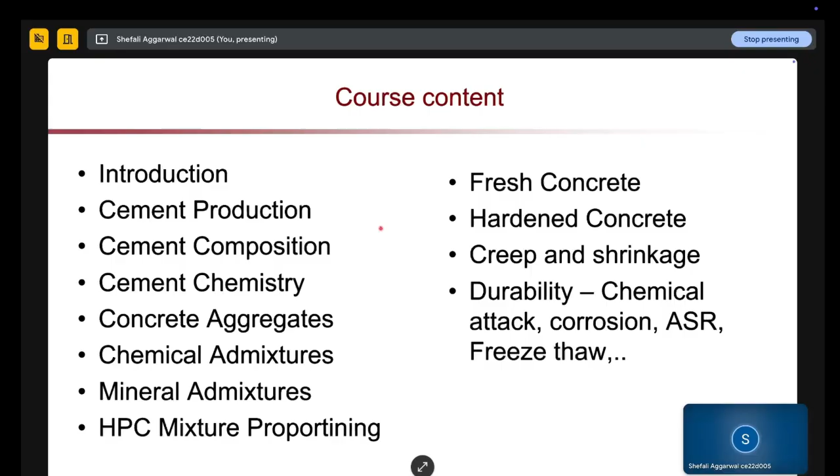So in this last lecture we'll be starting with the durability of concrete. As we discussed last week, the main durability issues with concrete systems are corrosion, then chemical attack like sulfate attack, then alkali silica reaction, then delayed ettringite formation. Why these issues happen depends on the transport mechanism in the concrete system, what materials you are using, and what mix design you are using. And normally, unlike strength properties, we are not checking durability properties beforehand, before doing mix design.

We stopped our last lecture on ettringite formation, the different types of ettringite forming in the concrete system. First is primary ettringite, which forms at the early stages because of the hydration of which component? C3A. Okay. Other is late primary ettringite, where more sulfates are present, which gives late ettringite formation. If you remember our hydration curve, it will show this late ettringite formation.

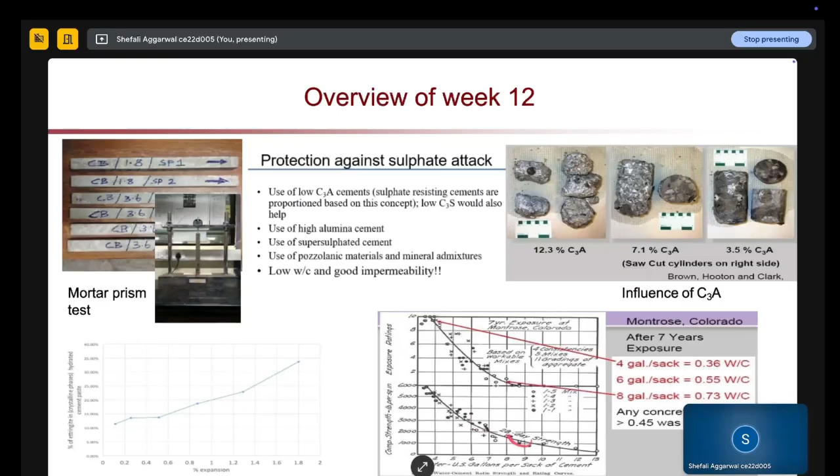The other thing is how your water to cement ratio and other factors are affecting your expansion rate. This is a PCA study done on a similar basis: this is your strength value, this is your exposure rating, and here we are talking about water to cement ratio. It is not given as we use nowadays, like 0.36 or 0.55; it is given as US gallons of water per sack of cement. Based on that, how your strength and exposure rating are changing. If you have more C3A, more ettringite formation, what will happen? Because of higher water, your strength will decrease.

Next, what are the different tests which can be done for sulfate resistance? The first test is ASTM C452, in which we add gypsum to the mortar bars to get 7% sulfates, and 14-day expansion is measured. The next test is ASTM C1012, where mortars are externally exposed to sodium sulfate solution after attaining 20 MPa of strength. In this case also we measure expansion. Since C452 is internal sulfate, we measure at 14 days; in external we measure at 6 to 12 months. So these are the two tests we do for checking the sulfate resistance of our concrete system.

Here again is another example showing how water to cement ratio changes the property of our concrete system. If the water to cement ratio is higher, you can see more white chunks forming, and at lower water to cement ratio you have a denser concrete. So here you can tell more ettringite formation and less ettringite formation. Okay.

And from this example, this is an example of external sulfate attack. Because of sulfate attack, ettringite formation and crack formation, your concrete is getting deteriorated. This is like salt crystallization, physical attack, the same concept. Because of the presence of sulfates in your soil, there will be more formation of needle-like structures, and your concrete will get disturbed.

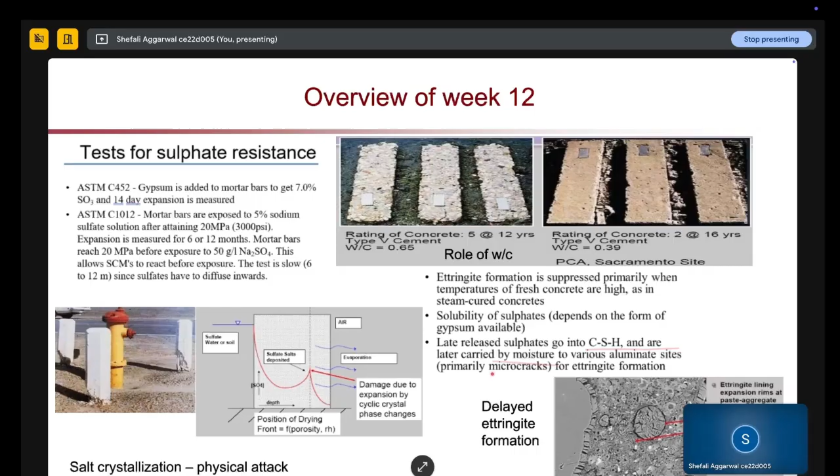So in this case, what is happening? This is the mechanism of DEF. It is mainly suppressed when temperatures of fresh concrete are high and in steam curing. Because the sulfates, depending on your gypsum, get soluble, it won't let your ettringite form at that point. At later stages, these sulfates get released from the concrete system, get into the CSH, are later carried out by moisture, and form ettringite further. Okay, so that is the concept of delayed ettringite formation. So that's about sulfate attack.

So why is chloride attack important? Any idea? So what will happen with chloride attack? Any idea?

So because of entrance of chloride in concrete, your rebar can get corroded. That is the one issue with the chloride attack. Another issue is with the addition of chloride, it can bind with C3A, and if you have a higher C3A content, your chlorides can bind with C3A and can prevent the corrosion of steel rebars.

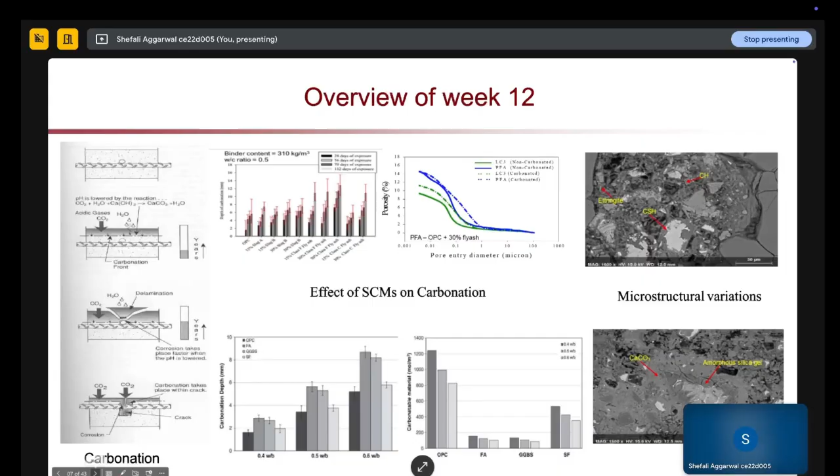So this is a microstructure variation. This is uncarbonated, and then this is carbonated. So in uncarbonated you have hydroxide, and in carbonated you have calcium carbonate formation.

Okay, so that is all about carbonation and other durability issues, like chloride attack and carbonation attack. Both of these durability issues will actually cause corrosion in concrete structures. At the end of the day, that is what is happening because of chloride attack and carbonation attack. So if we talk about corrosion of steel in concrete, these are the basics.

An electrochemical cell is forming: this is the steel, this is the concrete, and the point where your metal is losing electrons will be the anode, and where it is receiving electrons will be the cathode. Through concrete it is ionic conduction, and through metal it is electronic conduction. So this is a basic electrochemical cell which will form in our concrete system. This will be the anodic or oxidation reaction, iron converted into iron ions, and this will be a reduction reaction where oxygen and water convert into hydroxides.

So this is the same thing which is shown here. At the anode you have the anodic reaction, at the cathode you have the reduction reaction. When your steel rebar is corroding, the corrosion products which are forming, oxides of iron, are expansive in nature. Corrosion products can increase the volume by 6 times. If the volume of corrosion products increases, it will start causing pressure in your concrete system and will cause cracks at a later stage. So that is the main deterioration mechanism in your concrete system due to corrosion.

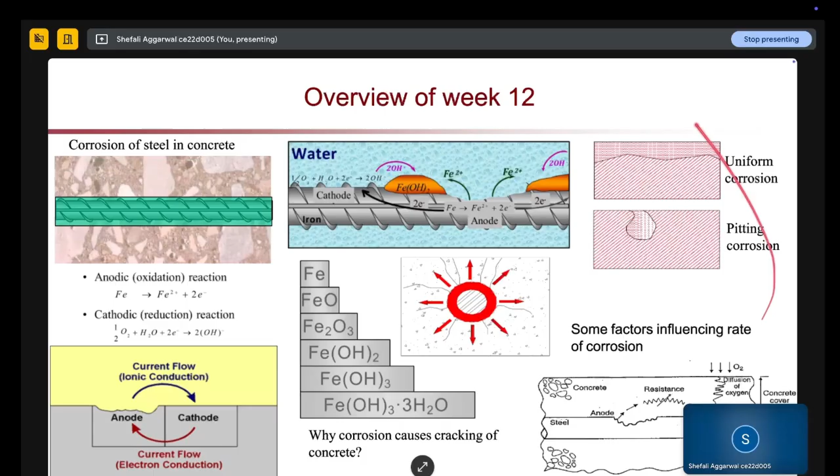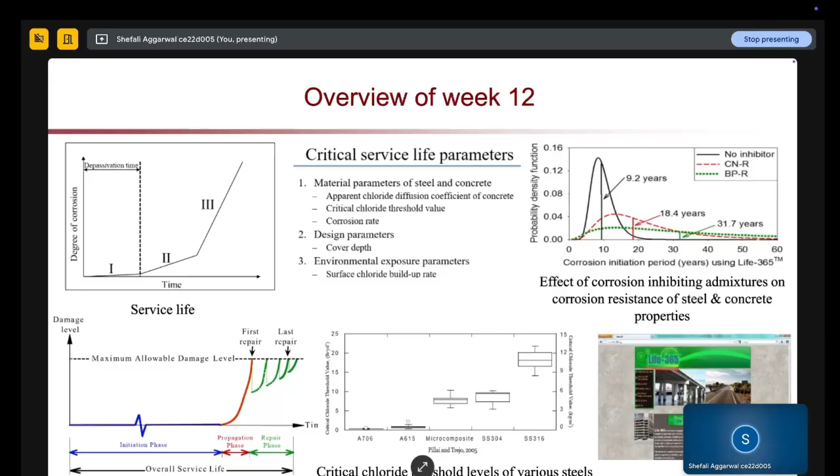And here we are seeing how different inhibitors can affect your service life, propagation, or probability of corrosion. When we don't have any inhibitor, your service life will be approximately 9.2 years. With the addition of different types of inhibitors, your service life increases. So how to calculate this type of graph? We have a software called Life-365 through which you can calculate your service life or probability of corrosion initiation.

Another thing is cathodic protection. In this case we are applying an external voltage or current to the steel to keep it cathodic in nature and prevent oxidation from occurring. And also if you use a zinc anode in connection with your steel rebar, that is also called a cathodic protection method.

Another thing is using stainless steel instead of normal steel. You can use higher potential value steels like stainless steel; it will have a stable passive film. Then we have providing good cover depth and using good quality concrete with low permeability.

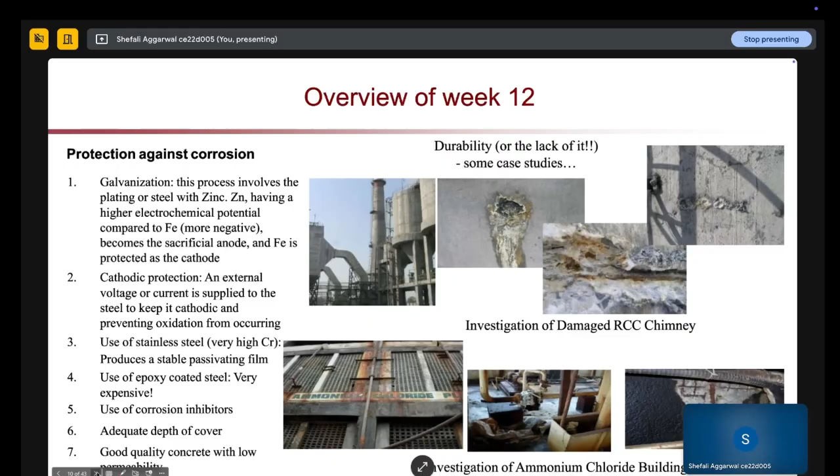Okay, so another type of damage in our system is alkali silica reaction. What is happening in this case? The alkali present in concrete reacts with the silica present in your aggregates in the presence of moisture to form ASR gel, which is expansive in nature and causes cracking in your concrete system. So mostly if you see map type cracking, that is mostly due to alkali silica reaction. So this is the complete phenomenon showing ASR damage.

So there is presence of alkalis in your environment and presence of silica in your aggregate. Silica reacts with water forming SiOH, and then this SiOH will react with the OH ions of the alkalis in your concrete system and will form SiO negative plus water. These SiO negative molecules will form a gel over your aggregate.

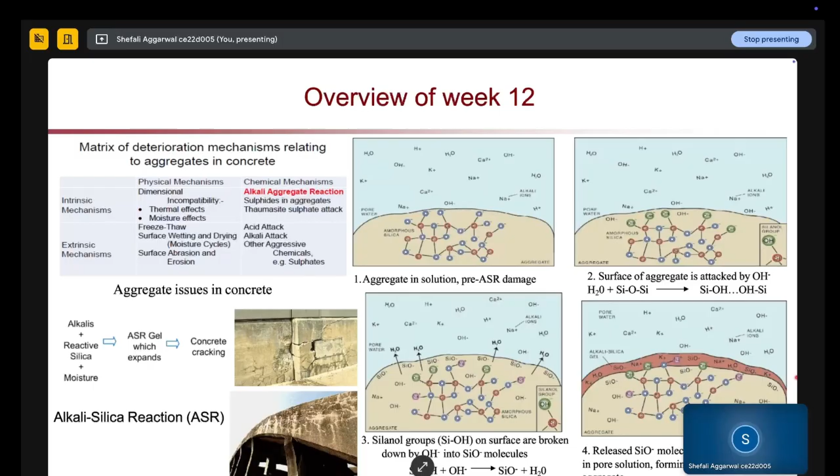Then further, if you see here, these gels will expand, connect with each other and form cracks in your concrete system. So when the cracks reach the surface, at that point you can see map cracking forming over your concrete surface. So that is your alkali silica reaction.

So how can you protect your system against ASR? The first thing is using low alkali cement and then preventing excess moisture. Then we can use waterproofing coatings over the concrete, which will prevent the ingress of moisture into your concrete system. Then we can use chemical admixtures like lithium salts, which will bind the reactive silica present in your aggregates and make it a non-expansive product. Then lastly, use of mineral admixtures like silica fume.

So how will the mineral admixture help? First, it will reduce the porosity of your concrete system. Secondly, it will bind your alkalis in hydrated gel and won't let your alkalis react with the reactive silica in your aggregates.

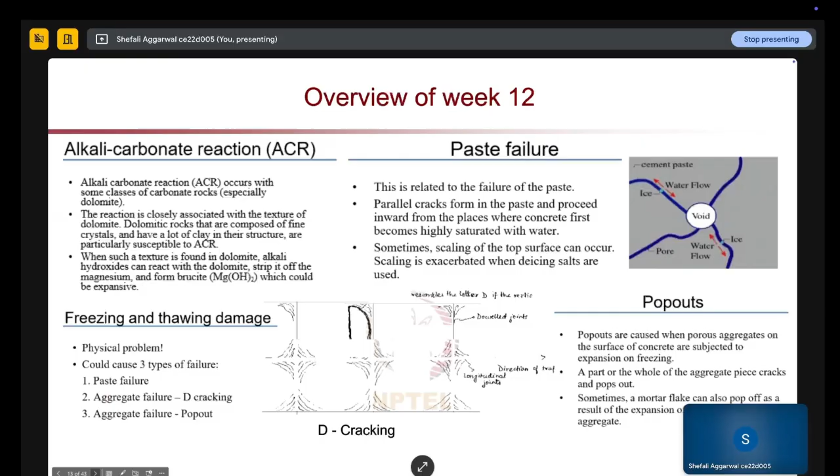Okay, so that's all about week 12. We will see some questions and answers. Before that, if you have any doubt, please feel free to ask. You can put your question in the chat box also. In case there are no questions, we will see some questions and answers for this week.

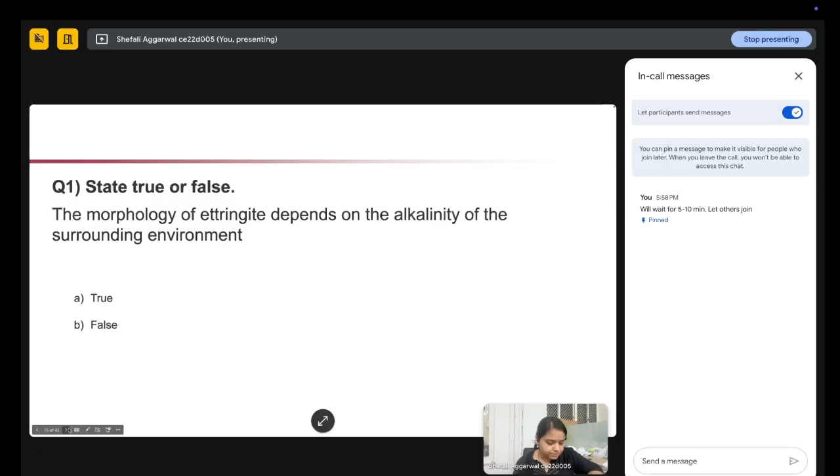The first question is, state true or false: the morphology of ettringite depends on the alkalinity of the surrounding environment. True or false? Anyone? Here you can see what we are talking about. This is true. If you have a very high pH value, the length to thickness ratio will be very low, but if you have pH between 10 and 11, you have a very high length to thickness ratio, so it is a true statement.

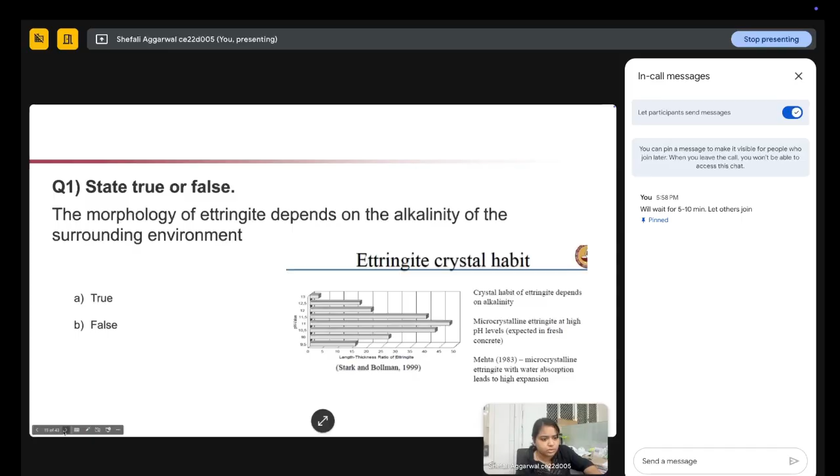The next question is, the expansion caused by microcrystalline ettringite is blank the expansion caused by needle-like ettringite: same, more, or less than. Someone said more than. Let's see. So it's true. Microcrystalline ettringite will have more expansion compared to needle-like ettringite.

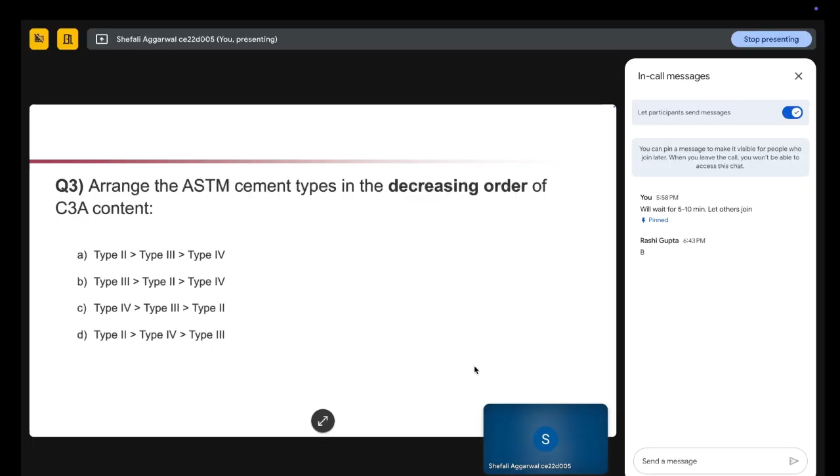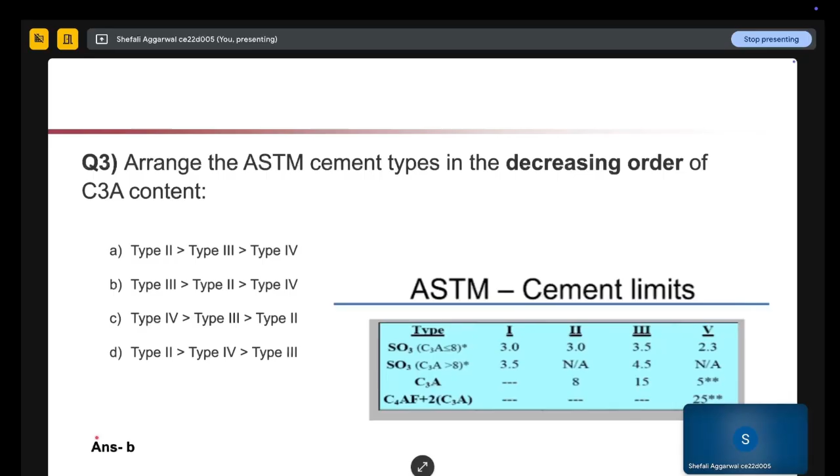The next question is, salt crystallization within porous media is a critical durability issue. Sodium sulfate salt can exist in different forms depending on temperature and humidity: thenardite and mirabilite. Which are true statements? Thenardite has embedded water molecules in its microstructure. Conversion of mirabilite to thenardite involves volumetric expansion. Conversion from thenardite to mirabilite involves volumetric expansion. Or mirabilite has embedded water molecules in the microstructure.

There was a slide on salt crystallization. Here we are talking about different forms of sodium sulfate. Based on that slide, can you tell which statement or statements are true?

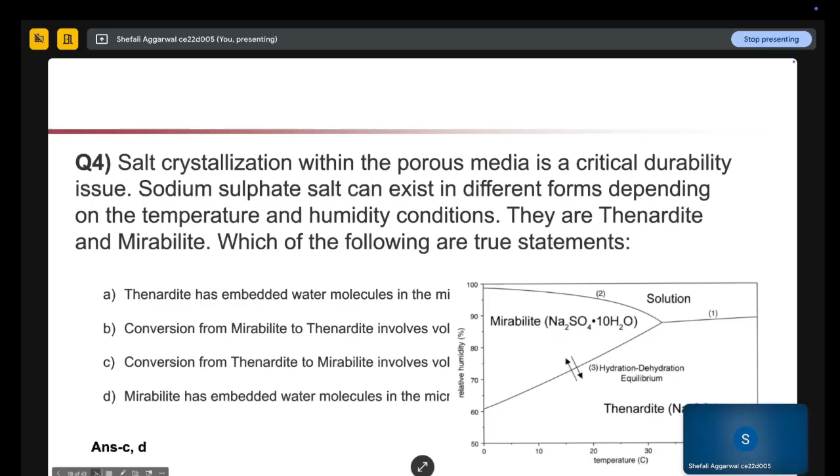Next is: which of the following conversions will cause volumetric expansion? So if you see here, this is your mirabilite and this is your thenardite. If you are changing from thenardite to mirabilite, there is an increase in volume, right? Because if you see the composition, there is an increase in volume. So options C and D are the correct answer. Is there any doubt on this question? Okay, if there are no doubts, we will see the next question.

Choose the correct statement or statements corresponding to chloride attack. Chloride attack on the cementitious matrix causes the formation of expansive products. It can be reduced by the use of cement with low C3A content or high C3A content. Mineral admixtures rich in aluminates show poor performance against chloride attack. So which statement or statements do you think is correct? Any idea? Anybody?

Okay, if you remember, we talked about what happens if there are more aluminates, more C3A. Your chloride will bind in your concrete system. Chloride binding will happen. So that gives us the third option as correct: it can be reduced by the use of cement with high C3A content because chloride will bind in that case. Expansive products, no, because chlorides are not reacting with your cementitious material, so it won't cause any expansive products. The last is no, same thing: if you have higher aluminates, it will have higher performance against chloride attack. So the only correct option is C. Is that fine?

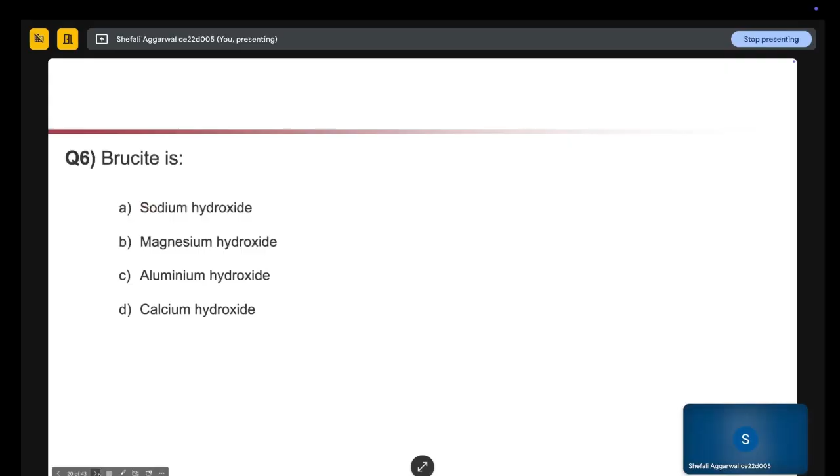Okay, so the next question: brucite is a polymorph of which type of material? Sodium hydroxide, magnesium hydroxide, aluminium hydroxide or calcium hydroxide. So it is a type of magnesium hydroxide. Okay.

Next question: carbonation increases the strength of normal concrete but decreases the strength of concrete blended with SCMs. Is that a true or false statement? That graph was there, if you guys remember. It's a true statement. So what will happen in normal concrete? In the OPC system, when calcium hydroxide is converted to carbonates, the carbonates will densify your pores, so it will increase the strength. But in SCM blended concrete, pores will be more. If you remember that MIP graph, you have higher porosity in your SCM concrete, so your strength will decrease.

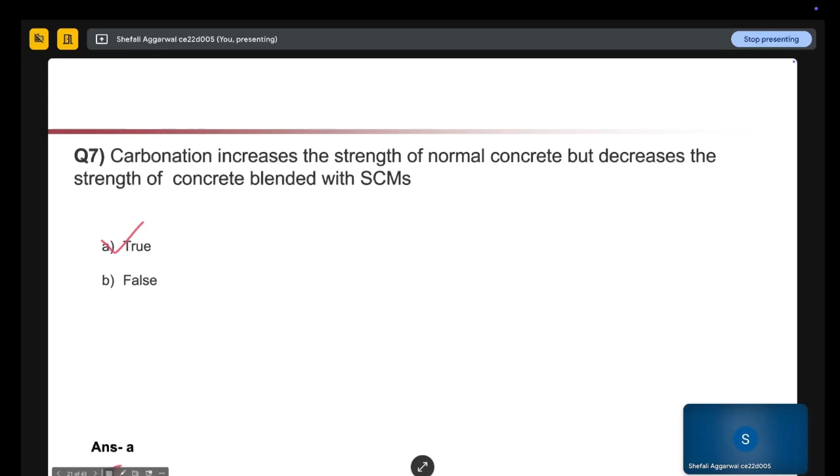Next question: choose the correct statements corresponding to metallic corrosion. The location which forms hydroxide ions and utilizes the electrons is the cathode. Reduction reaction happens at the anode. Residual strains and stresses make the metallic site anodic. Steel corrosion increases the volume by about 6 times. Chloride induced corrosion generally causes uniform section loss. Any idea which statement or statements are correct? Okay, option D. Any other statement you think is correct?

Okay, let's see statement by statement. The location which forms hydroxide is the cathode. That is a correct statement. At the anode, iron converts into Fe2+ ions, and at the cathode, water and oxygen form hydroxide. So this is correct. Reduction reaction happens at the anode? Wrong. We just saw reduction is happening at the cathode, which forms OH ions.

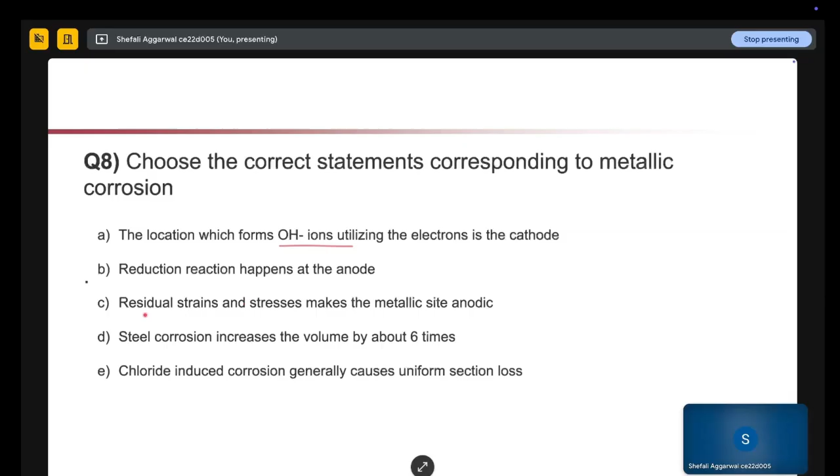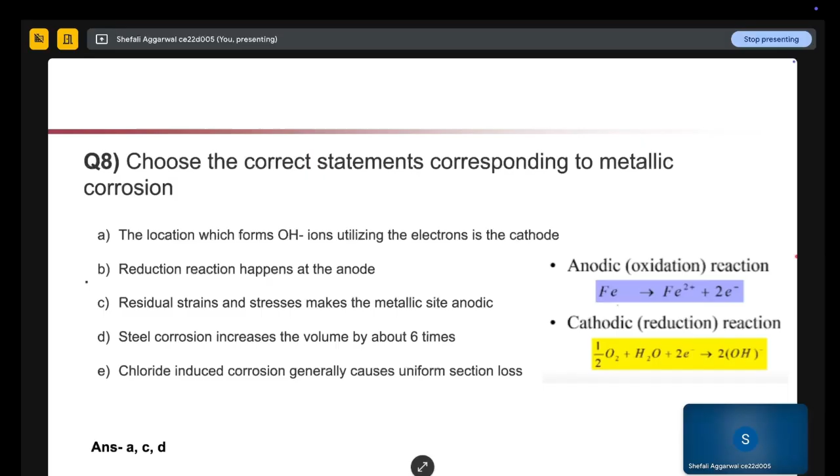Residual strains and stresses make the metallic site anodic. Correct. If you have more stresses, at that point there are higher chances of iron converting to Fe ions, so that makes it more anodic. Steel corrosion increases volume by 6 times. You already answered that, so this is also correct. Chloride induced corrosion generally causes uniform section loss. This is wrong. Chloride causes pitting corrosion. So the correct options are A, C and D. Is that okay? Okay, then we will see the next question.

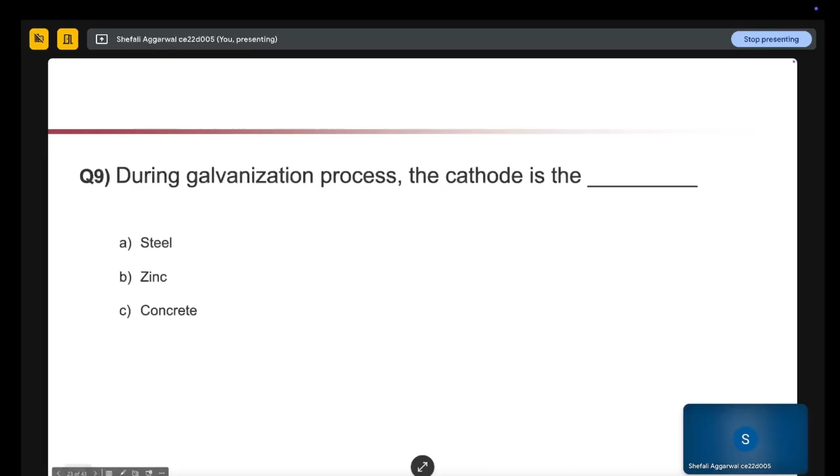During the galvanization process, the cathode is the steel, zinc or concrete? Obviously concrete cannot be the cathode. In galvanization, we provide zinc as a sacrificial anode. So your steel acts as the cathode. Next question: passivity of stainless steel is due to the presence of magnesium, zinc, cadmium or chromium. This is a simple one. Because of the presence of chromium in stainless steel, you have higher passivity.

Next question: two concrete columns were constructed near a stream. Apart from the source of aggregates, the two columns are similar in aesthetics, function, composition and strength. Column A was constructed using andesite aggregate and column B using granite aggregate. Which one has a higher possibility of alkali silica reaction? How is alkali silica reaction happening? Because of the presence of reactive silica in aggregates, right? So which type of aggregate will have reactive silica present?

So granite usually doesn't have any reactive silica, so it's mostly andesite type of aggregates. So which will have higher alkali silica reaction possibility? Column A. Is that clear?

Okay, so the next question is: choose the correct statements regarding alkali silica reaction. Mineral admixtures tend to increase the chances of alkali silica reaction. As the surface area of silica particles increases, ASR gel formation decreases. Hydration of the silica gel leads to black discoloration as it oozes out. Higher percentage of reactive aggregates can reduce the chances of ASR. Which one do you think is correct in terms of alkali silica reaction?

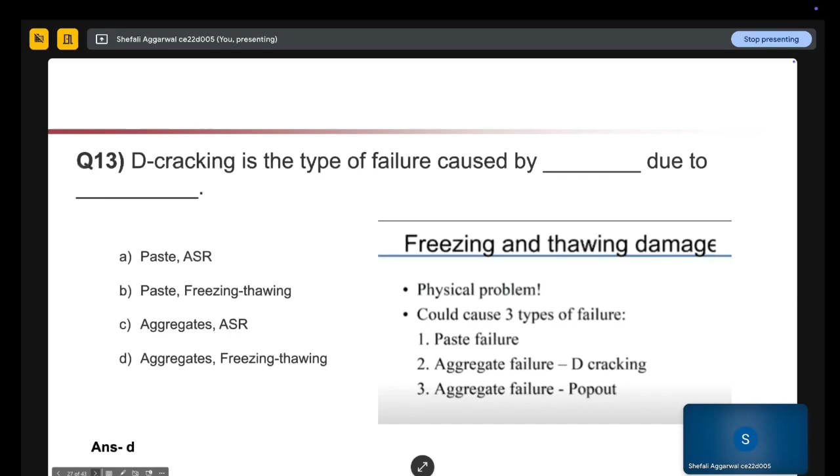Next question: de-icing salts are sprayed on the concrete during the extreme winter season in western countries. They act by reducing the boiling point of water, reducing the surface tension of water, reducing the freezing point of water, or reducing the coefficient of thermal expansion of water. Why do we pour de-icing salt on the concrete system?

So if we talk about the winter season, obviously we are not trying to reduce the boiling point of water, so this is a wrong option. Then, salts cannot reduce the surface tension of water. It can reduce the freezing point of water. It cannot change the coefficient of thermal expansion. So the only correct option is C. Okay.

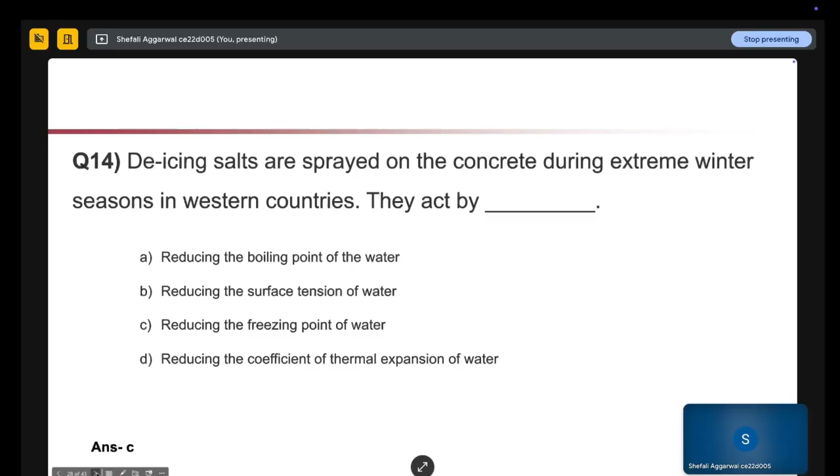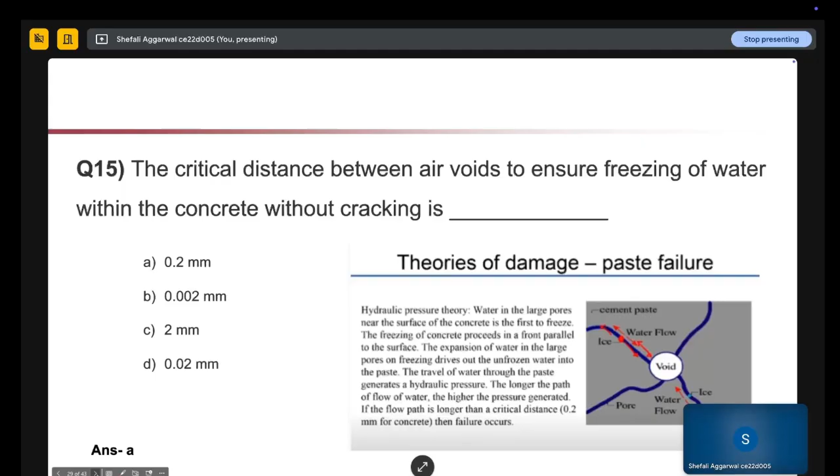The critical distance between air voids to ensure freezing of water within the concrete without cracking is 0.2 mm, 0.002 mm, 2 mm, or 0.02 mm. So I think you might not know about this. Here in this slide it is given that the critical distance is 0.2 mm for concrete; beyond that, failure will occur. So the answer is A. Fine.

So the next question: formation of ettringite in cement concrete is always expansive in nature. True or false? Usually, even in our normal concrete system, we have a little bit of ettringite formation, and it is not always expansive in nature. Unless it is delayed ettringite formation, it won't be expansive in nature. Okay.

Next question: acid attack in sewers is mainly due to the formation of hydrochloric acid, sulfuric acid, acetic acid, or nitric acid. When we talk about acid attack, it is the acid forming H2SO4. So which one of these is H2SO4? B, correct. Sulfuric acid is H2SO4.

Delayed ettringite formation occurs mainly in cold concrete, steam cured concrete, underwater concrete, or lean mixes. When we talked about ettringite formation, we talked about two things: one is C3A content, the other is curing temperature, right? If you remember. So in this case, which one is correct, cold or steam cured? Mostly it is steam cured. When your curing temperature is more than 70 degrees Celsius, there are chances of delayed ettringite formation. So B is the correct option.

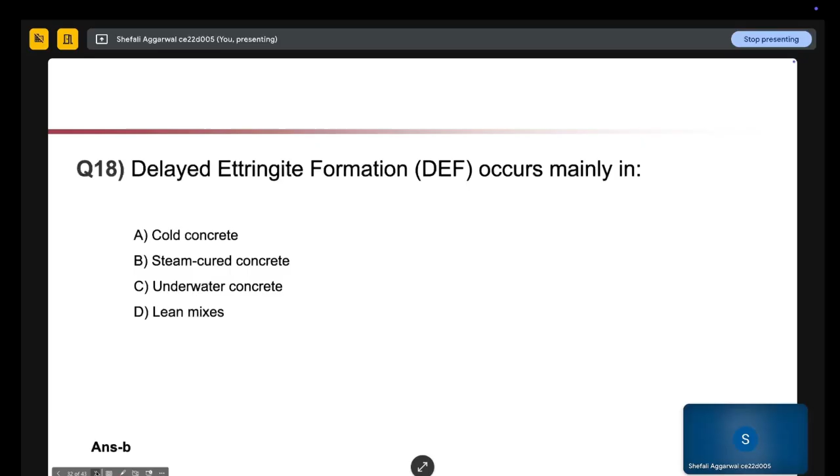Okay, next question: pozzolanic materials help prevent sulfate attack by increasing C3A, reducing permeability, increasing water to cement ratio, or promoting expansion.

So the answer is by reducing permeability, you can prevent external sulfate attack. Which test measures sulfate resistance in mortar bar? So we talked about different ASTM methods for sulfate resistance. So which test were we doing for mortar bar? ASTM C1012, C1202, C876, C231. So it is answer A, C1012, where we are calculating the expansion in our mortar sample at different times.

The main acid formed in silage beds that attacks concrete is acetic, nitric, sulfuric, or lactic. Now we are talking about silage beds, it's not in our sewer system. So in silage beds, mostly acetic acid is forming. Sulfuric acid will form in the sewer pipes.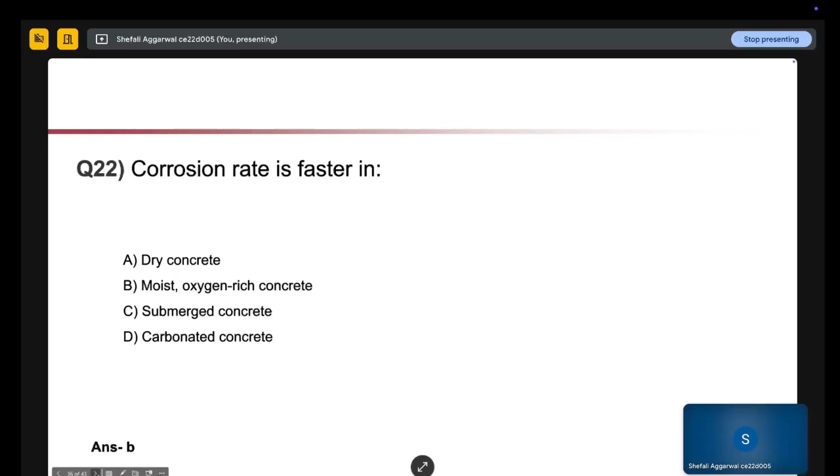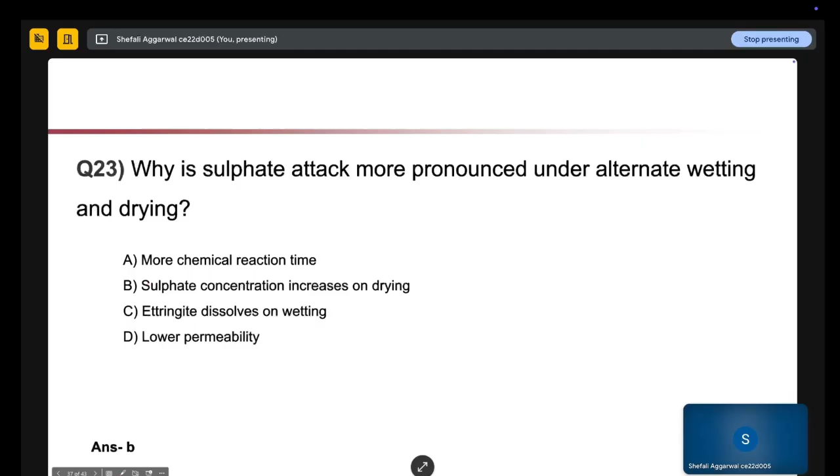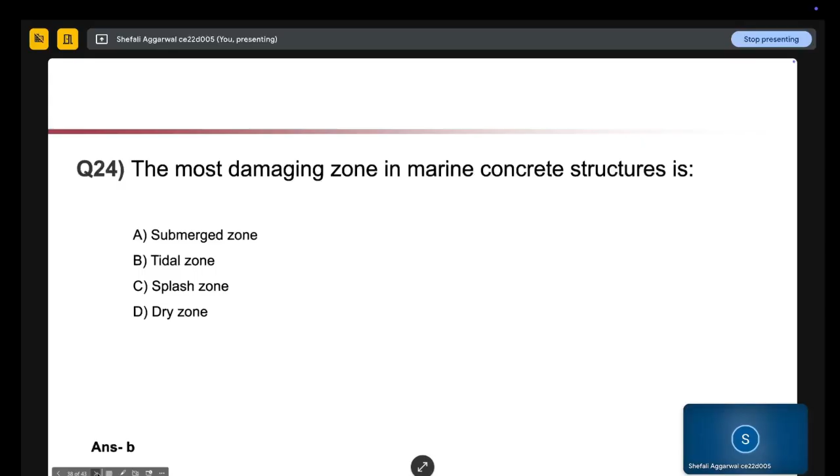The most damaging zone in a marine concrete structure is submerged, tidal, splash, or dry zone. So we already discussed this. You have a submerged zone, then you have a dry zone. So mostly in your tidal zone or splash zone, you have more damage. B, tidal zone. Actually, splash zone is also tidal zone only. So both are correct answers in this case.

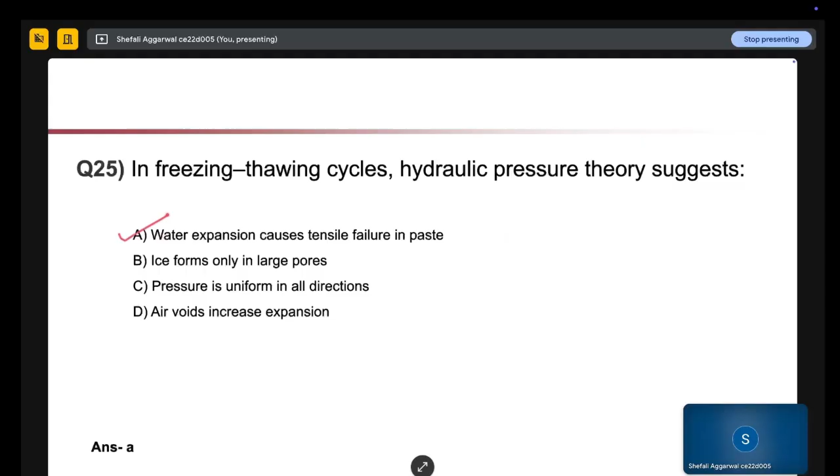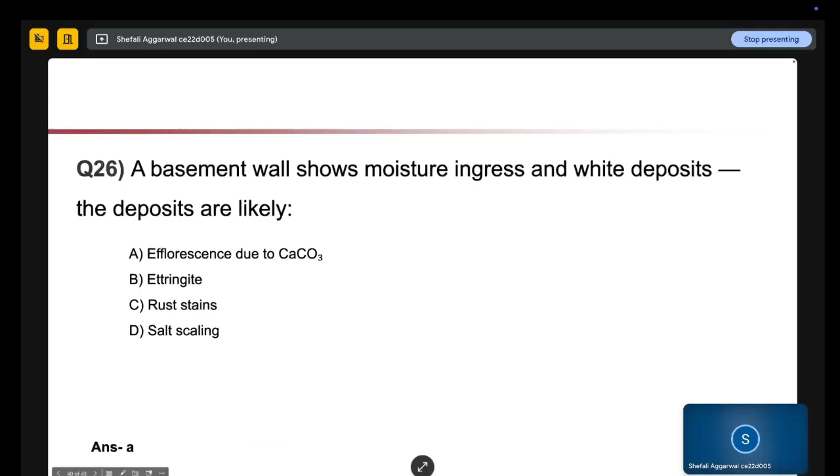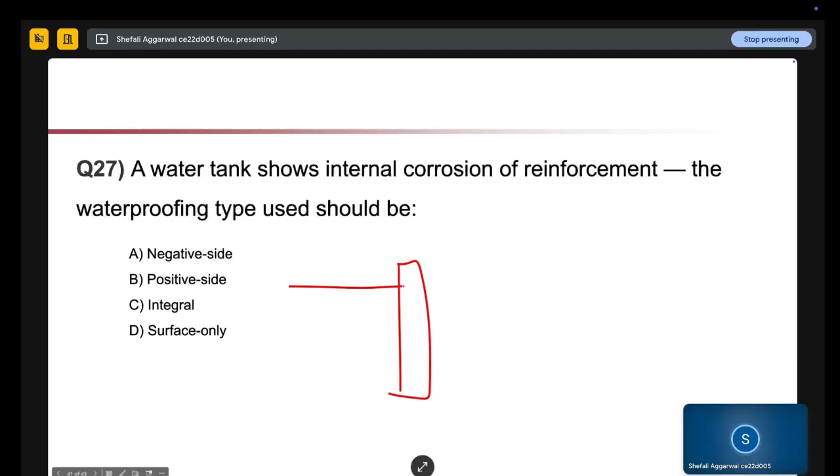A water tank shows internal corrosion of reinforcement. The waterproofing type used should be negative type, positive, integral, or surface-only. So if you don't know about positive and negative waterproofing, let's say this is your concrete wall and on this side you have water. If you are providing your waterproofing at this point, you are preventing water from ingressing into the concrete. That is called positive waterproofing.

But if you are providing it inside the wall, let's say this is your room, then this is a negative type of waterproofing, where you're preventing your room from getting wet, but your concrete can get wet. So here there is corrosion of reinforcement and waterproofing is provided. If your reinforcement is getting corroded because of water, then mainly it is negative side waterproofing. To prevent this type of corrosion we should use positive waterproofing. So if it was asked which waterproofing is already used, then it can be negative type.